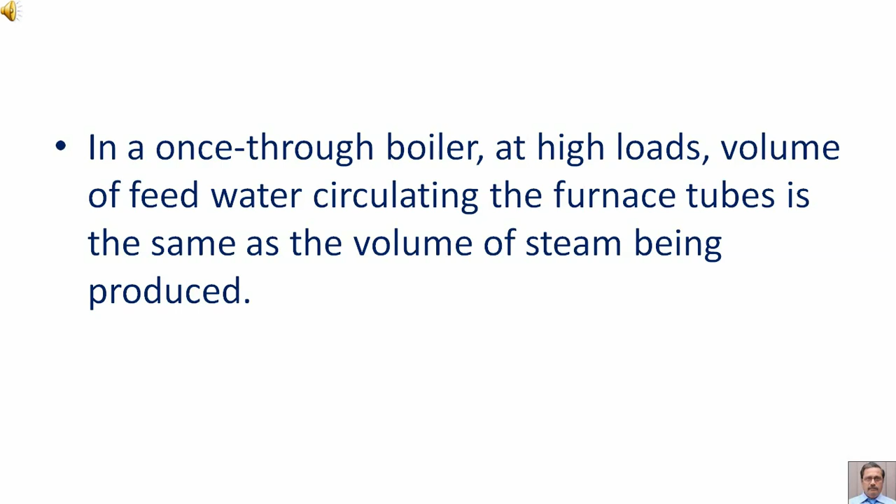In a once-through boiler at high loads, the volume of feed water circulating the furnace tubes is the same as the volume of steam being produced. The water keeps the furnace tubes cool. Lack of water will cause overheating and damage to the tubes.

In a once-through boiler, there is a problem at low loads where a disturbance in combustion, for example from starting a mill, may cause overheating.

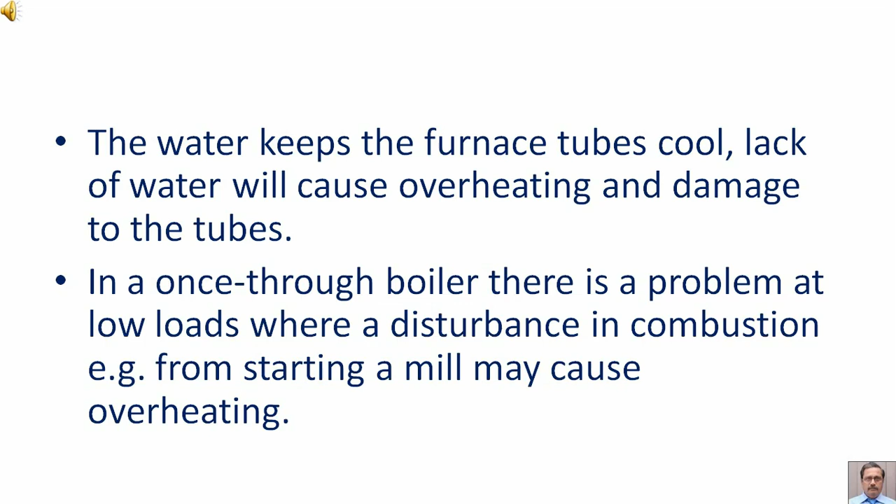Benson load: to prevent this, the once-through boiler reverts to a forced circulation system below a critical load or flow. This is known as the Benson load and is around 30% to 35% of BMCR, boiler maximum continuous rating. Below this, the water from the evaporator walls passes to the storage vessel instead of a drum.

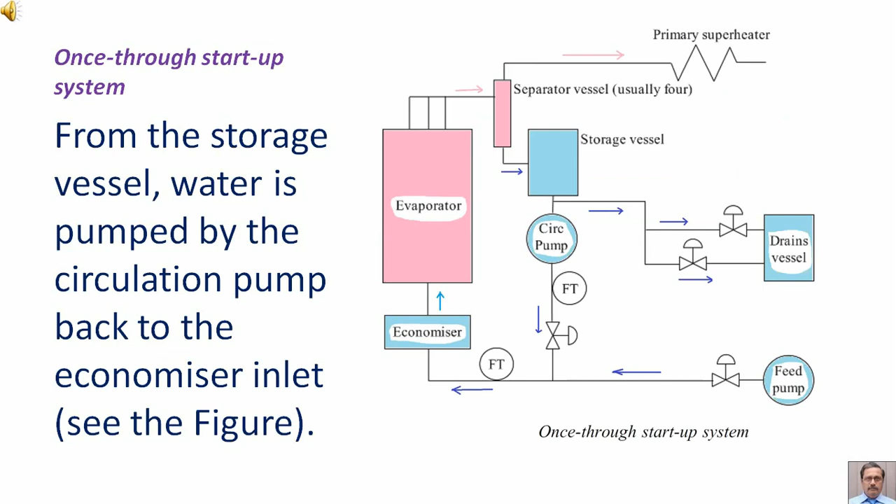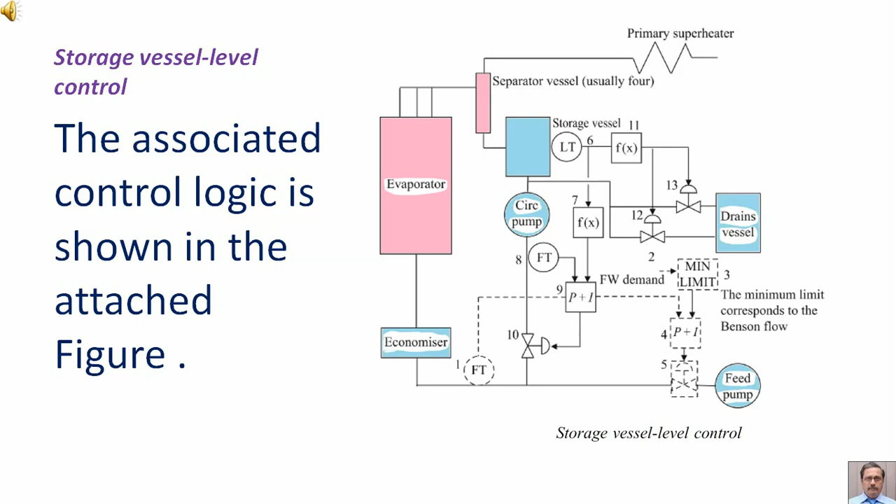From the storage vessel, water is pumped by the circulation pump back to the economizer inlet. See the figure. The associated control logic is shown in the attached figure.

There are two main control loops shown here. First control loop, the storage vessel level control loop, consists of components number 6, 7, 8, 9, 10, 11, 12 and 13.

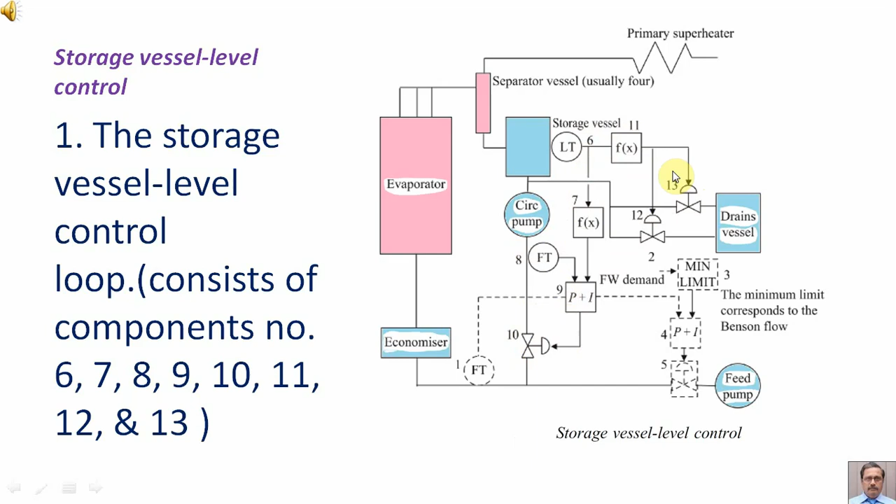Second control loop: it is part of the overall boiler feed water control, which is shown by dashed lines. It consists of components number 1, 2, 3, 4 and 5.

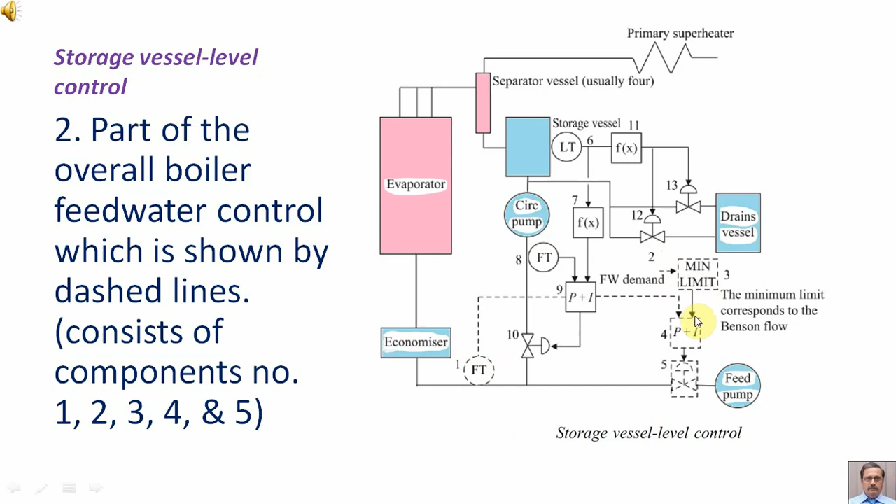From startup to Benson load, the feed water control components number 1 to 5 ensure a minimum flow of 35% BMCR flow passes via the economizer and evaporator.

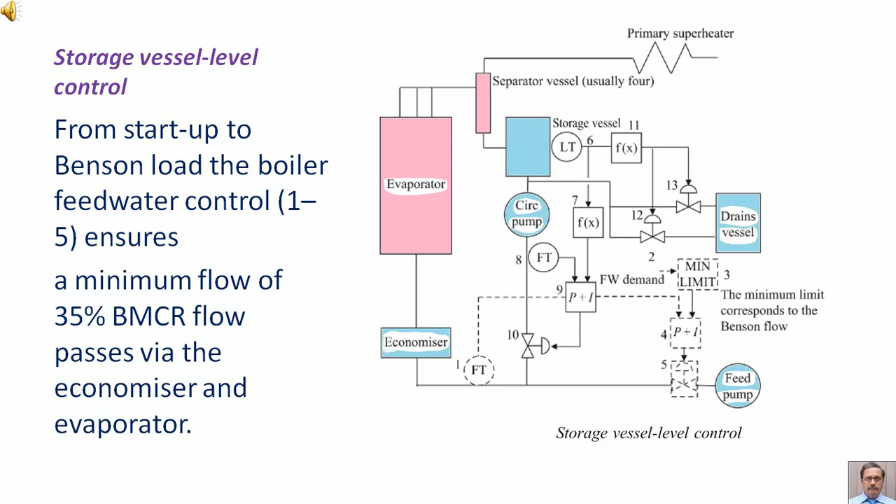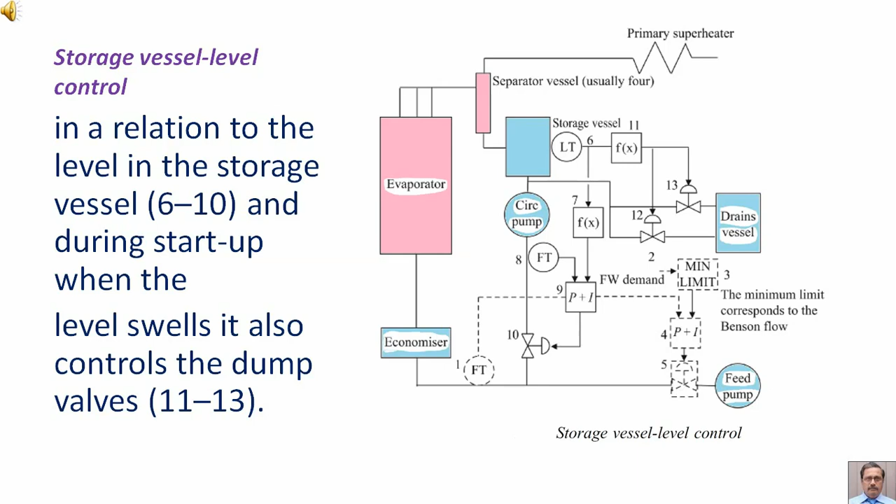In relation to the level in the storage vessel, components 6 to 10, and during startup when the level swells, it also controls the dump valves, components 11 to 13. The storage vessel level control system controls the flow via the circulation pump.

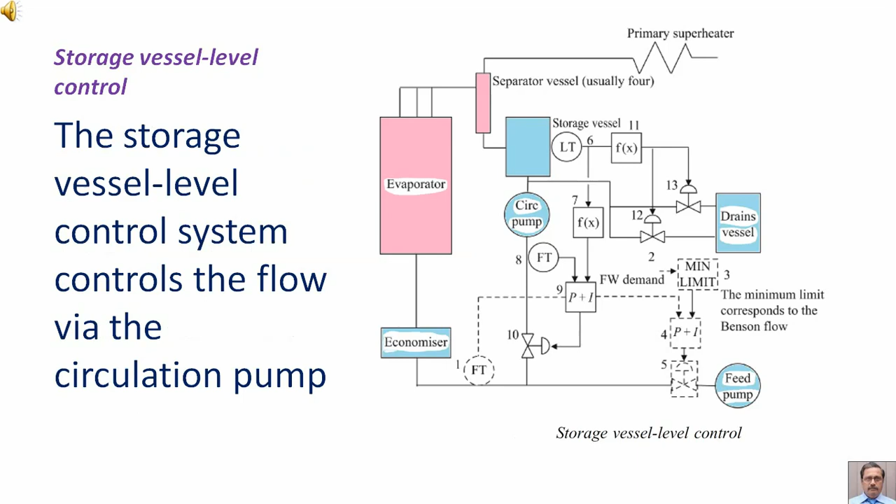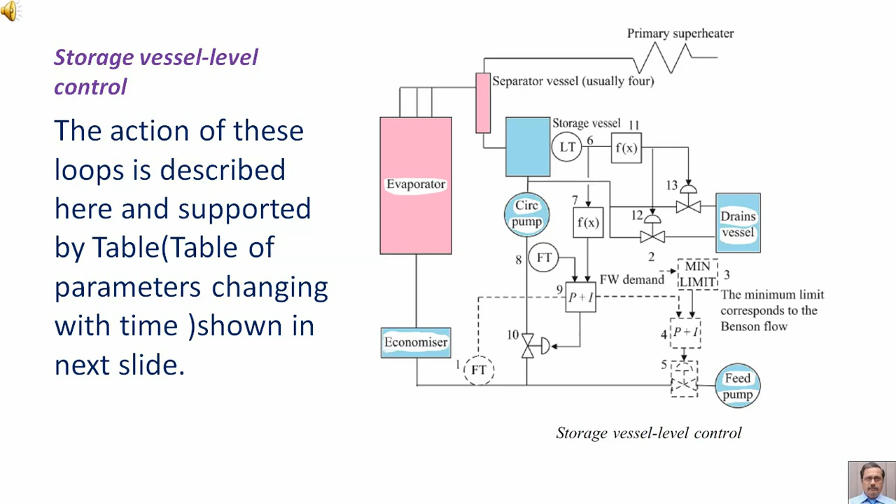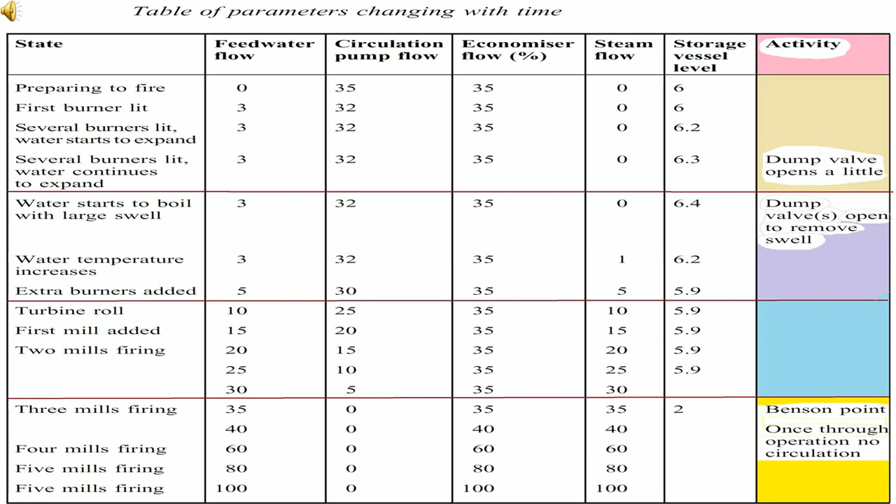The action of these loops is described here and supported by a table of parameters changing with time, shown in the next slide. This is the table of parameters changing with time. This table is divided into 4 rows. Each row shall be discussed in detail in the next lecture.

Storage vessel level control in a once-through boiler, part 2.